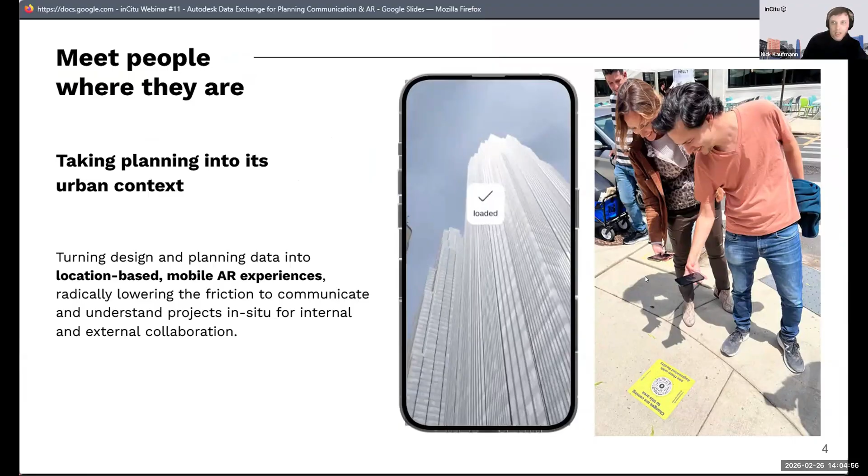We've been at this since 2020, and we work with AEC companies, city governments, developers, and technology products. Urban professionals from places like Washington D.C., Phoenix, New York City are integrating AR and experiential methods into their work, pursuing projects on everything from housing and climate resilience to infrastructure and transit.

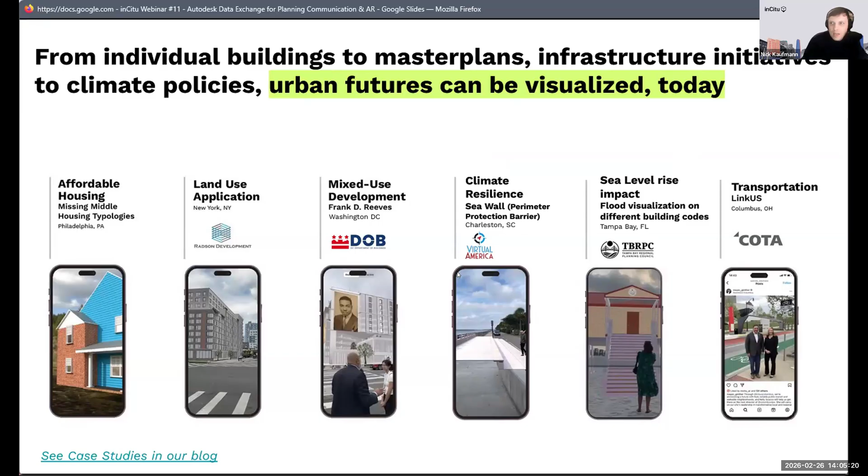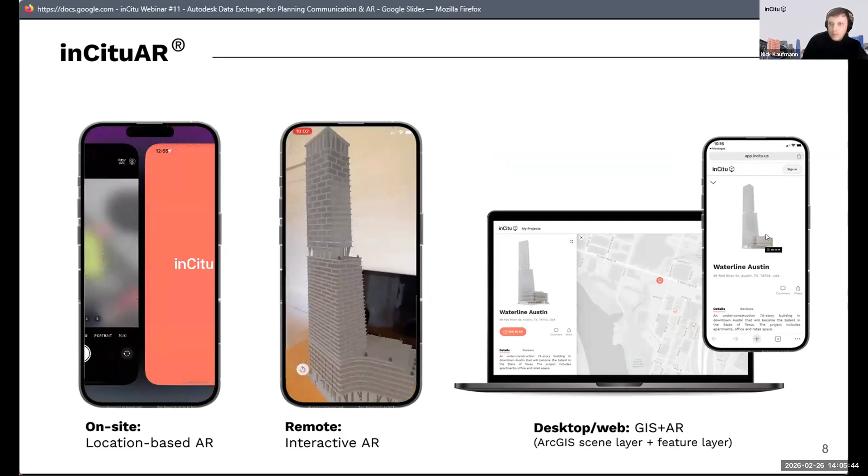Aside from the AR, we do a lot of design for on-site activations, everything from signage to the event programming for engagement, tours, walks, self-guided tours and talks, workshops. We also support storytelling on social media and community engagement campaigns that our clients are running, so that AR is used to actually create compelling stories that are shared out.

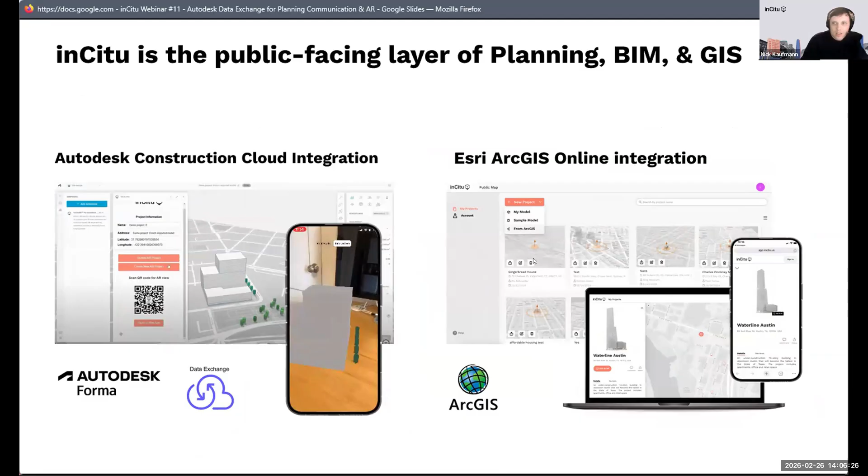A big part of making all of this as seamless as possible is how we connect with the tools and the data that AEC professionals are already using every day. Today's webinar is about exactly that. We're showcasing a new integration between inCitu and Autodesk Data Exchange that takes this connection to a new level.

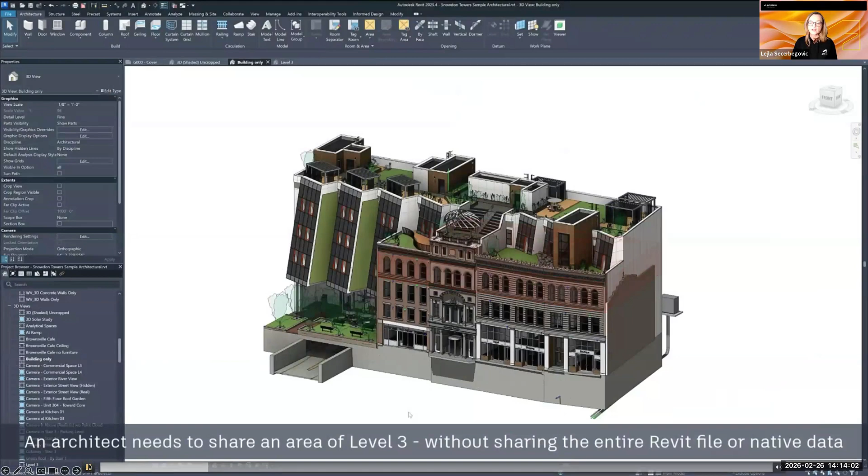So to show you a little bit how this really works, I have a couple of videos. Here you can see how the Revit user can prepare his subset of data. We don't have any complex mapping files or settings you need to compile. You can simply use the built-in tools like filters or even the section box to define which elements you want to share.

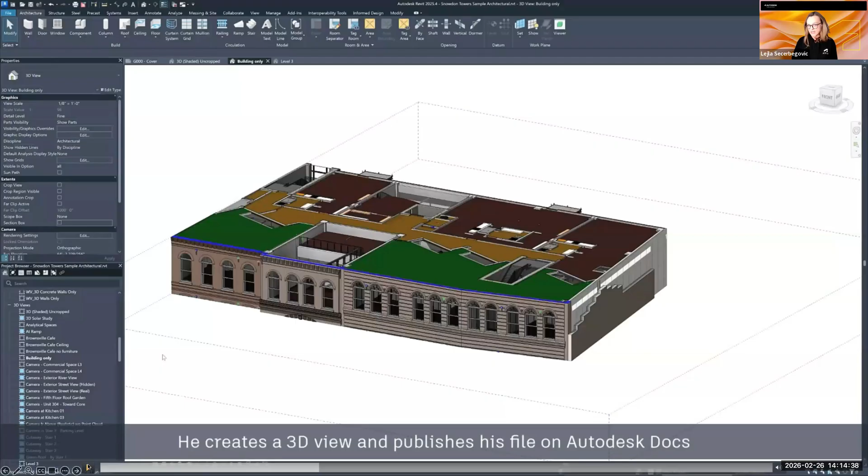Once you have defined these, you could now either use the connector from the Revit environment, which we will see in a minute, or you could simply save this Revit file on the ACC and use the ACC cloud connector. This is what we will see now.

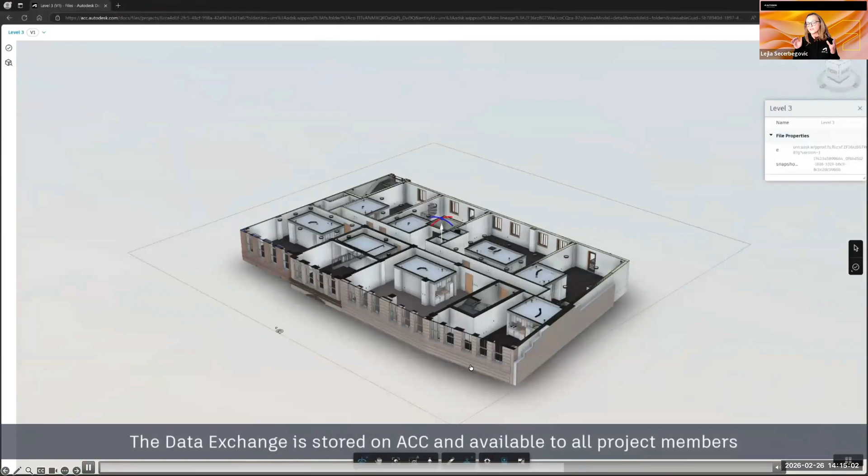So now we see the Revit file on ACC, and here you can simply select any 3D view which has been published to ACC and create a data exchange out of it. You can select a folder where this data exchange can be stored, and then this data exchange can be viewed on ACC like any other file, but it really contains only the data which you have specified, and it will also be automatically updated whenever you update your Revit file.

So this is basically how the cloud workflow works, and the same data exchange, as mentioned, could now be used also in the inCitu app.

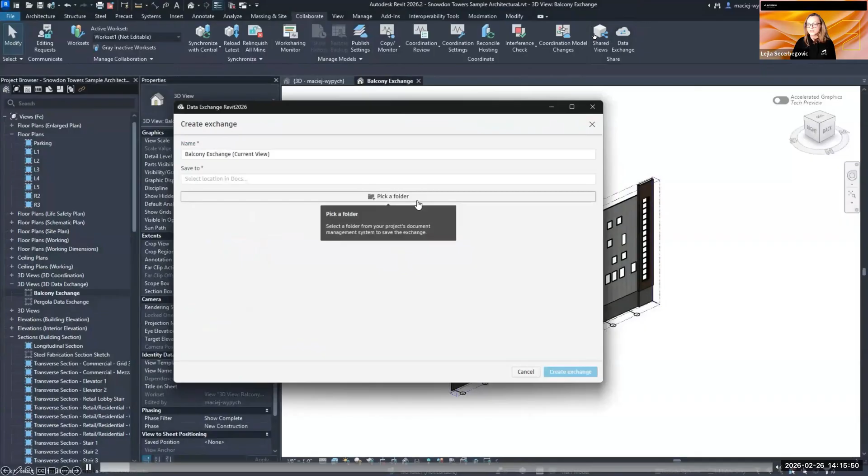To show you a little bit more about how data exchanges are used in the design workflow, let me show you the other way to share a data exchange from Revit. In this case, we are using the connector, which has been previously downloaded and installed.

Here in the connector, you have several different options. You can select the folder on ACC where this data exchange will be stored. You can also have several other options, like whether you want to include or exclude the Revit link elements, whether you want to include rooms and spaces as geometry in the data exchange. You can specify which view you want to use if it's not the one currently open, and then filter by categories as well.

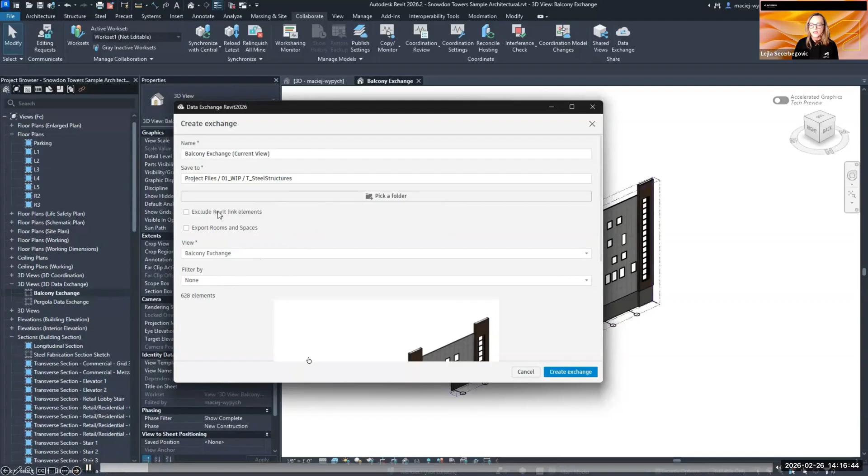So you could still limit the view, and you will always see the preview here. A data exchange is really a lot about what you see is what you get. You really see the preview, and the data exchange we create only has the elements you see in the preview. Again, the data exchange can be reviewed on ACC.

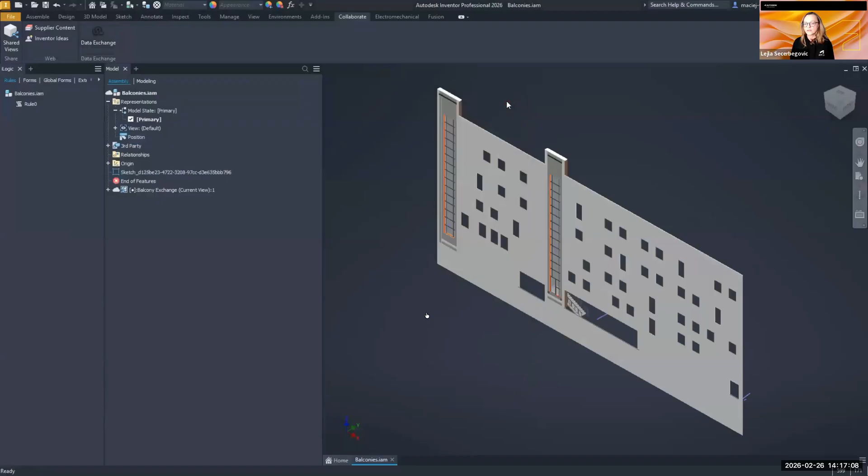It cannot be downloaded because it's not a file, but it can be reviewed and loaded by other connectors as well. In this case, we are loading it with Autodesk Inventor. The Inventor user uses it to configure the balconies, which he then shares as a data exchange with the Revit user.

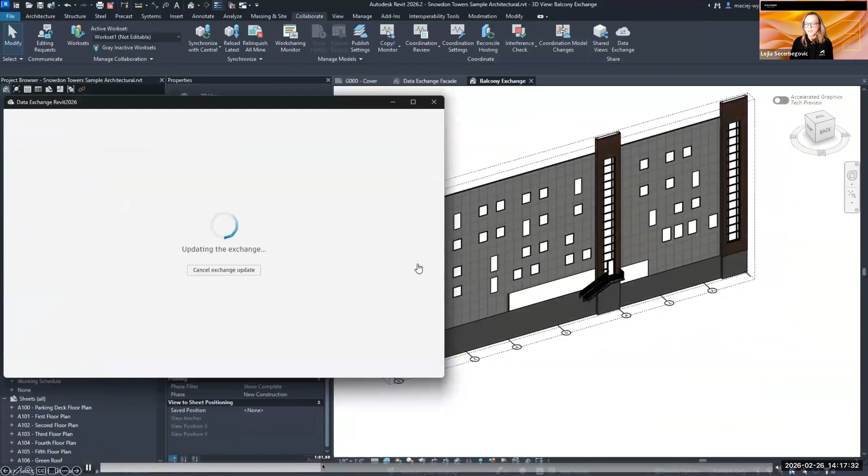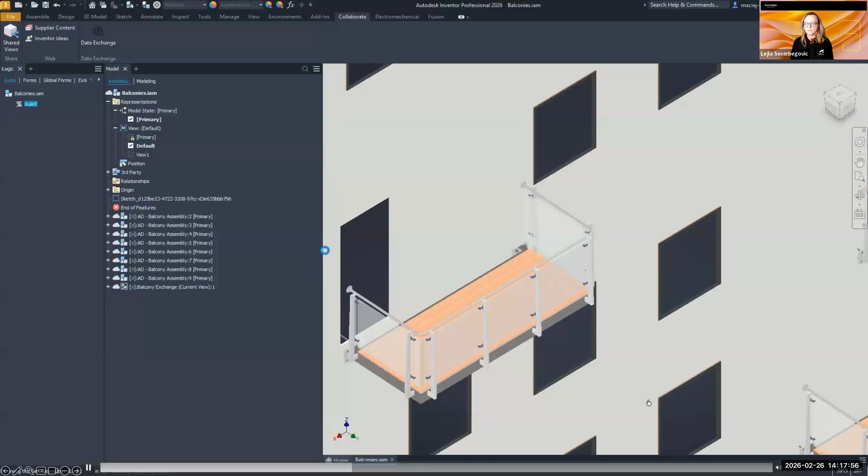And then the Revit user is again able to load these exchanges and maybe update his file, and also share, in this case, some requests with the Inventor user through ACC. So the data exchanges support all the Autodesk Construction Cloud workflows, like the comments and the issues, which can be used for communication.

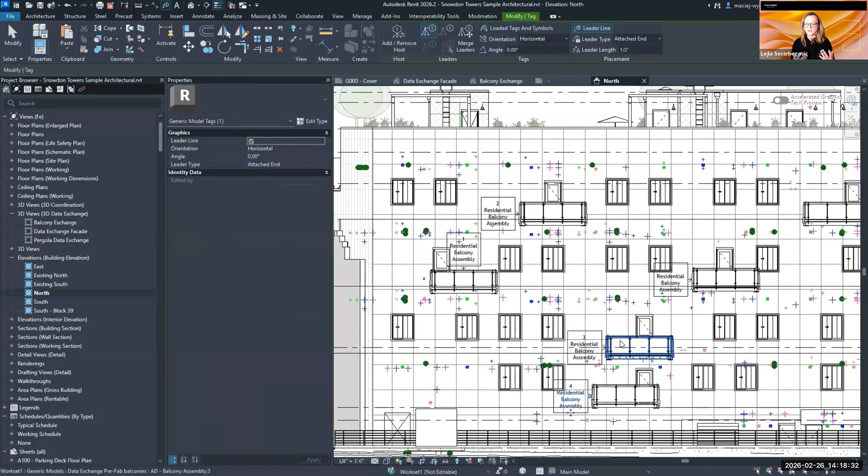Once we have received the updated file from the Inventor user, the data exchange can also be used for documentation, which means you can load these elements and tag them, schedule them, use them in all the sheets and views, and they are typically used for very stable documentation workflows.

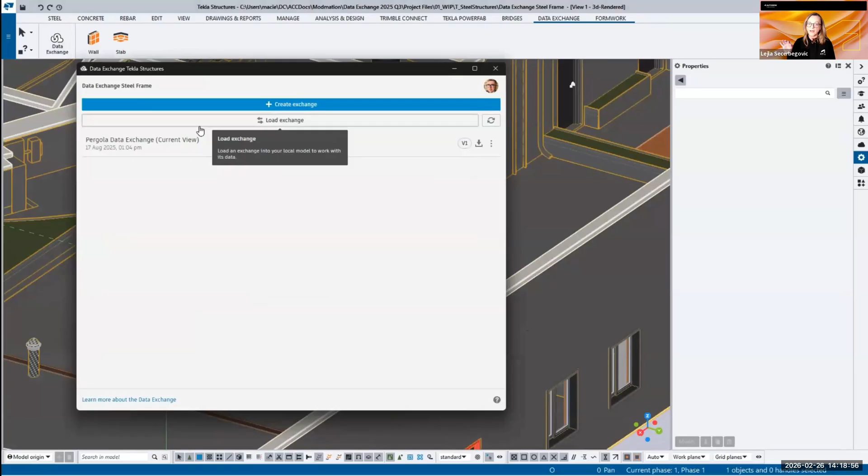Again, the same files can also be used in other software, for example, in this case, a third-party tool, Tekla Structures, where the same data exchanges can be loaded again. This means you really have a thread which goes through all the tools and allows you to use the data in a very flexible way as a reference, without worrying too much about any kind of settings or mappings. You can always adjust these, of course.

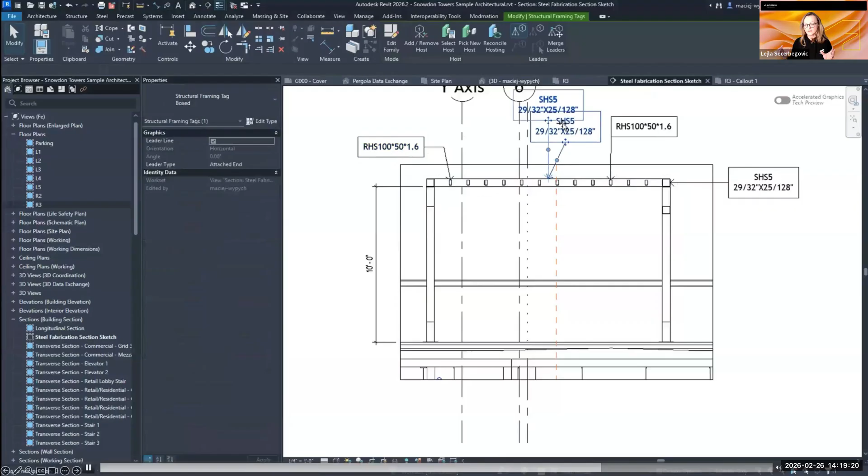But in general, we are able to see what we are sharing, and this is pretty straightforward. This goes all the way to other tools, as you have seen before in the overview of our data exchange connectors. We can also load the same data exchanges, for example, in Rhino software, where it can then be used for other workflows as well.

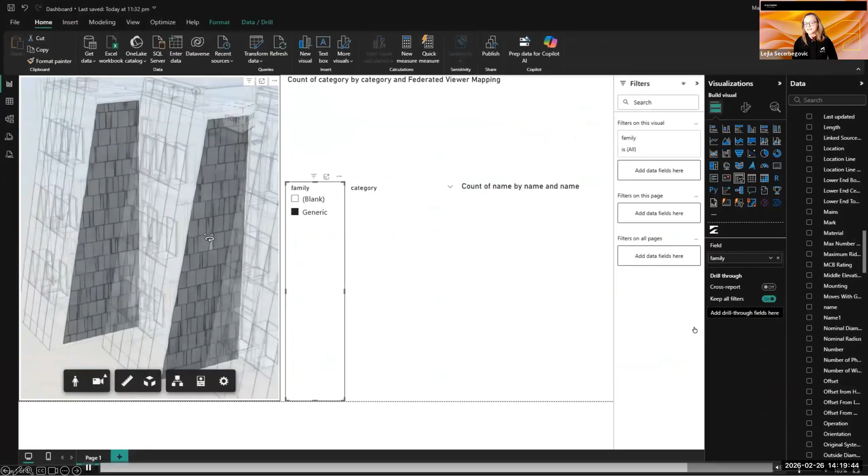And at the end, it can also be used in Power BI for dashboarding the data, because data exchange is not only about the geometry, it is actually about the data, and that means also the metadata which is attached to the elements.

Now to show you a little bit what our customers are doing with data exchange, I have a couple of nice examples. For example, WSP is using data exchange to make their designs and coordination models available to everyone, regardless of their BIM skills and regardless of their actual access to the BIM tools.

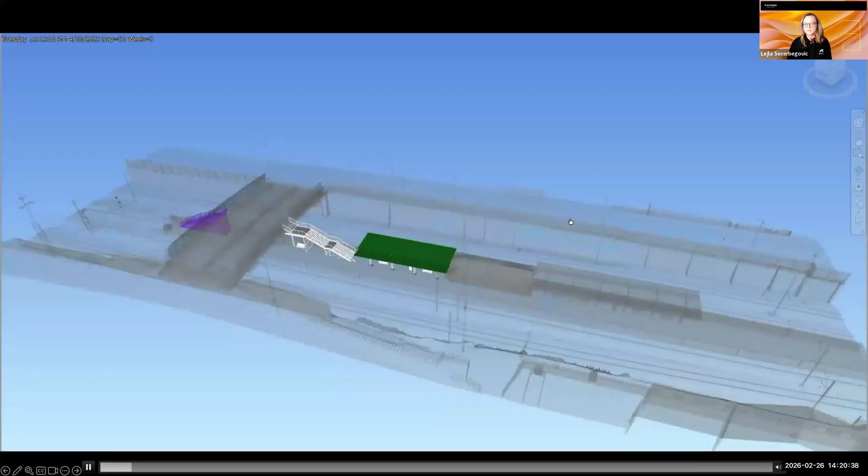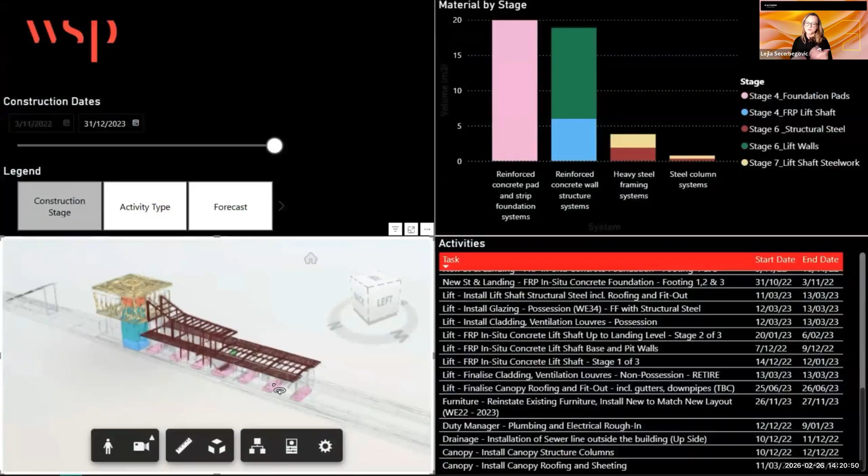In this case, they are using Navisworks to create some 4D simulations based on the project schedule. And since not everyone is really familiar with Navisworks or able to use it, they have pulled this data as a data exchange and then loaded it into Power BI.

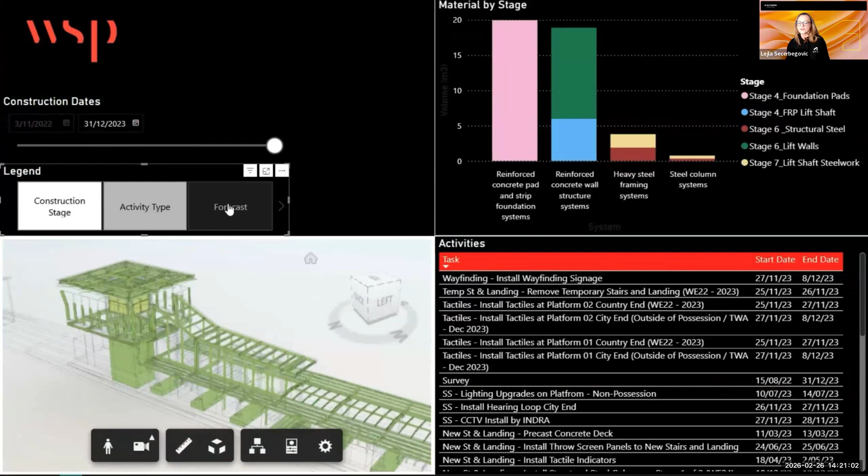And shared the dashboard basically on the web, so that everyone who has access to the dashboard and a web browser is able to use this data. As they mention themselves, this really makes it much easier to work with the data and to make the BIM data accessible to everyone.

A very similar approach is also used by another customer, the construction company Eiffage, who had a very complex bridge renovation project in France with many different stakeholders. They also had a similar challenge like WSP, to communicate the complex timetable and schedule in which the work needed to be done.

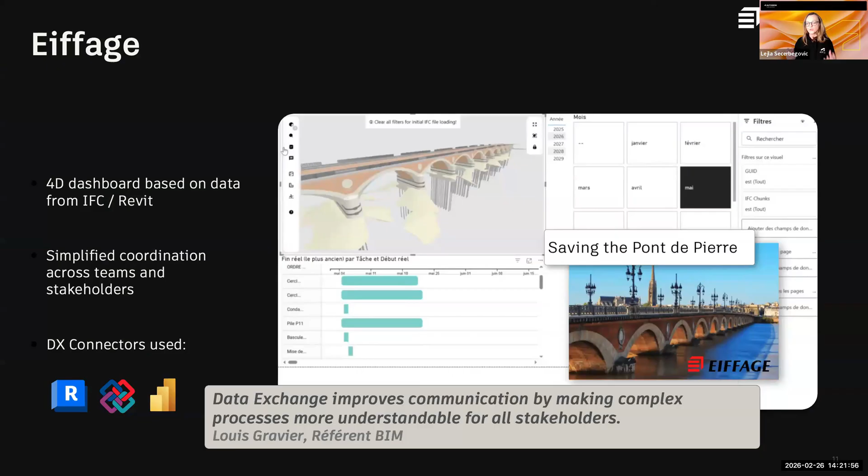And they did it as well using a Power BI dashboard, which allowed them to share this data in a way that could be easily understood on site by all the contractors who were not even able to use a 3D tool or work with BIM software. But they were able to view the dashboard in a web browser and every day check what needs to be done when, and also immediately see in the viewer where exactly the work is being done that day.

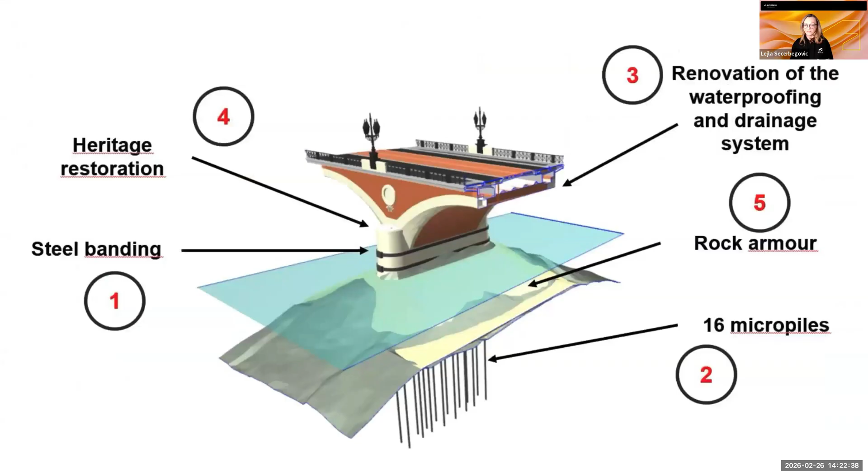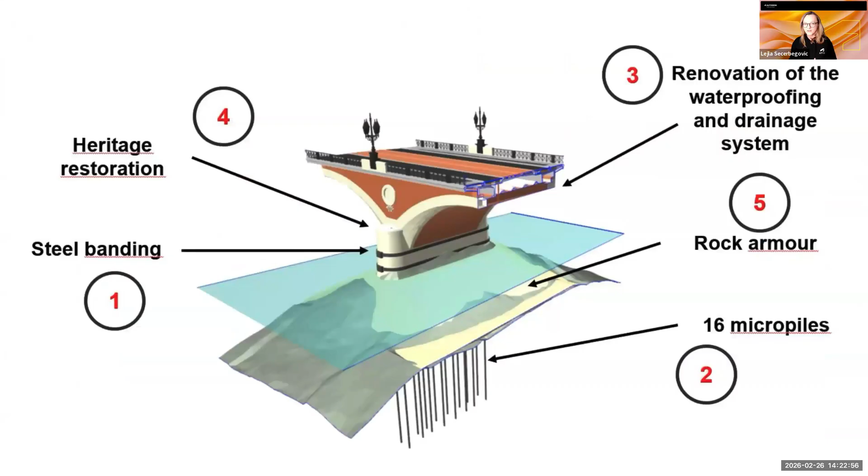And now thinking further and having a look at the great inCitu integration, I think it would have been even more amazing to have the same data exchange also available on the smartphone, because everyone has a smartphone these days, and to be able to also see it in context on the site.

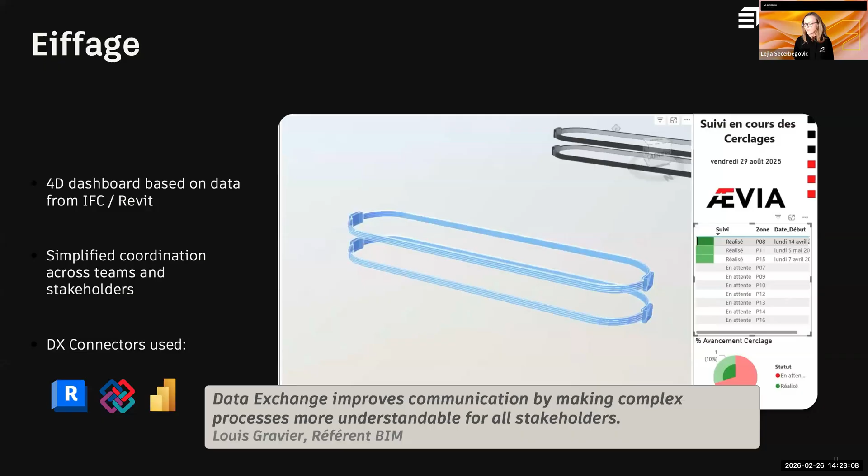That's about this use case, but there is actually a lot more to it, because you are not limited by the connectors which we build. We know that we cannot build all the connectors for all the tools out there, which is why we also work on our GraphQL API and the .NET SDK, which basically allow anyone else, like in this case also inCitu, to build their own connectors to work with data exchanges to create or load data exchanges, and by doing so to also extend the data exchange ecosystem. So I hope this provided you a quick overview of a data exchange.

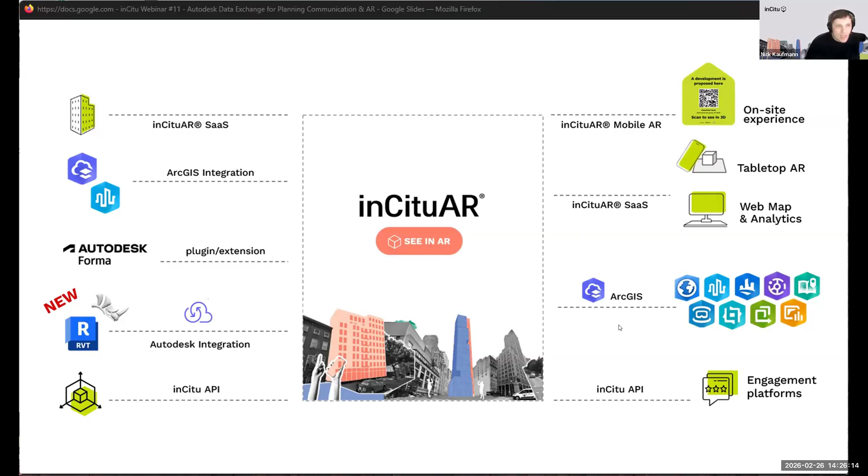On the output side, you can bring that content into AR via on-site signage, mobile tabletop AR, as well as web maps and analytics. And then we also have a host of third-party integrations and embeddables compatible with various tools. So if you wanted to take your tool from Revit, make it into a story map on ArcGIS, or build it into a third-party engagement platform that your city is using, we're trying to connect that all up seamlessly.

So I'm going to show how our integration looks today. This integration was developed by our engineer, Christian Toth, who's in the chat. So if you have any technical questions, or if I get anything wrong, please throw a question at Christian.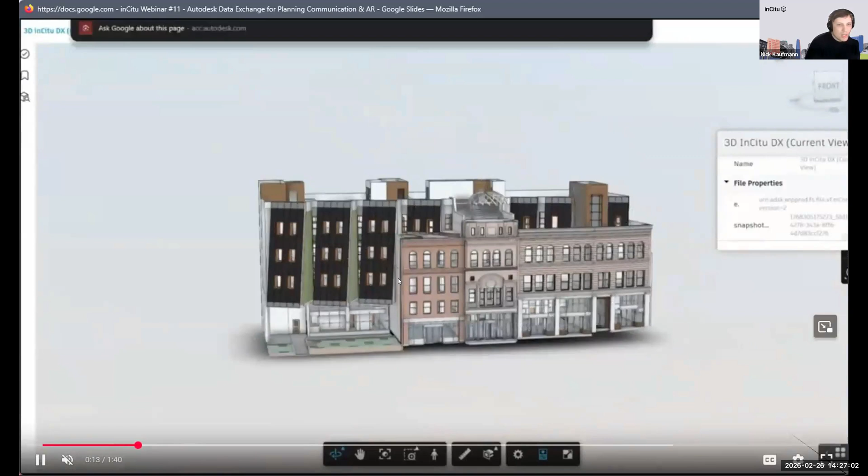We're copying the URL of this data exchange, and then from inCitu, we're going to sign in with Autodesk. And once we're signed in and connected, then we can actually paste that data exchange link directly in, and it will upload directly to our platform.

And so this is a new AR project. This is what you would see after the upload stage. And from here, there is a scene editor here too. So there's two places where you can adjust the content. One is in Revit before you create the data exchange, and one is in our inCitu scene editor, where you can further toggle meshes on and off and move things around and adjust pivot points, which is significant for AR purposes. And then you can also see the file size preview, and we support up to 35 megabyte models.

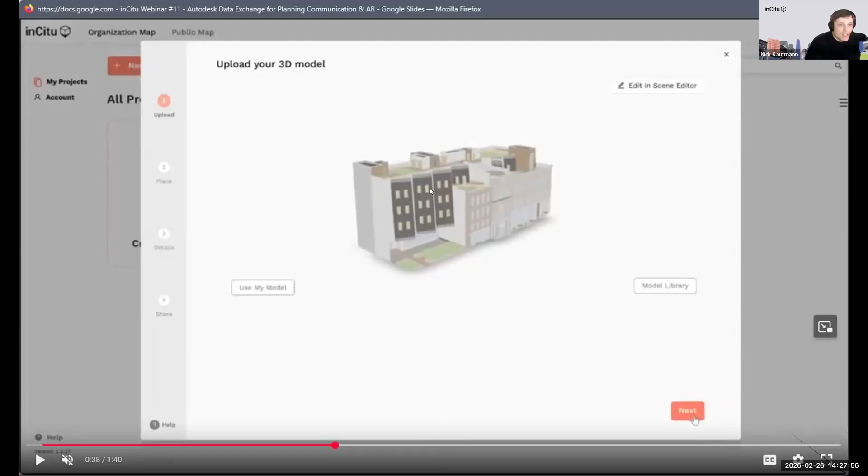So you've seen here, we were able to take just the parts of that big Revit model that allow us to work within that size and bring it in here to inCitu.

So the next step in inCitu is to place that model somewhere on the map, and this is where the model will live in the on-site AR mode. Then we give the project a name, and you can add a description and a thumbnail for the app clip cards, so users who don't have our app installed can view it, but they'll still see some information on their instant app and app clip cards.

And then once you create the project, it creates a QR code that is cross-platform, no app download needed, that leads to this project. If you're on site, you'll see it at real scale. If you're off site, you'll see it in tabletop mode. So once that project is created, you're good to go.

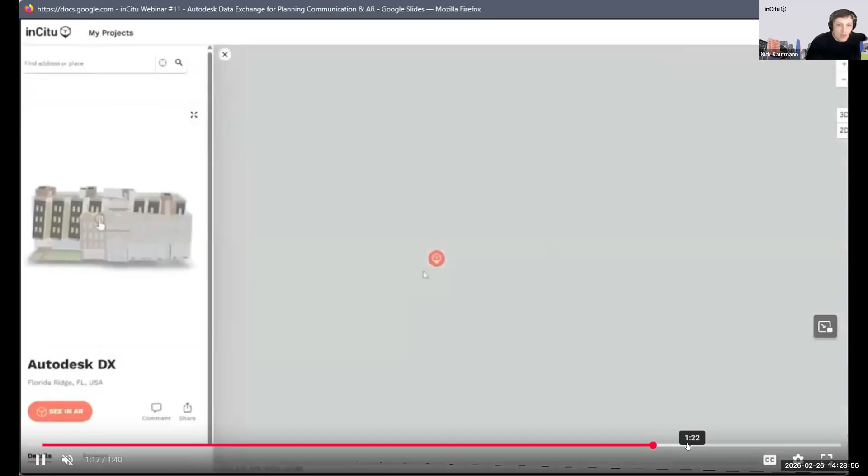And then this is how the web view of that project would look. And since I'm not in Florida, I copied in how this project would look here in New York on the ground. So once you get out on the street, you scan your phone and the project will load in.

And then from here, you have one more opportunity to adjust a project in AR directly using inCitu's AR edit mode. In the top left corner, you can toggle and actually adjust the positioning of the model, the scale, the altitude directly, so you can fine tune and get it looking exactly how you need from your viewpoint. When you save that, all the viewers will be able to see those adjustments.

And so this lets you get the most accuracy out of the current state of AR and actually get off the street grid and out onto beaches and into parks, thanks to being able to set those edit mode offsets. So this project is available now.

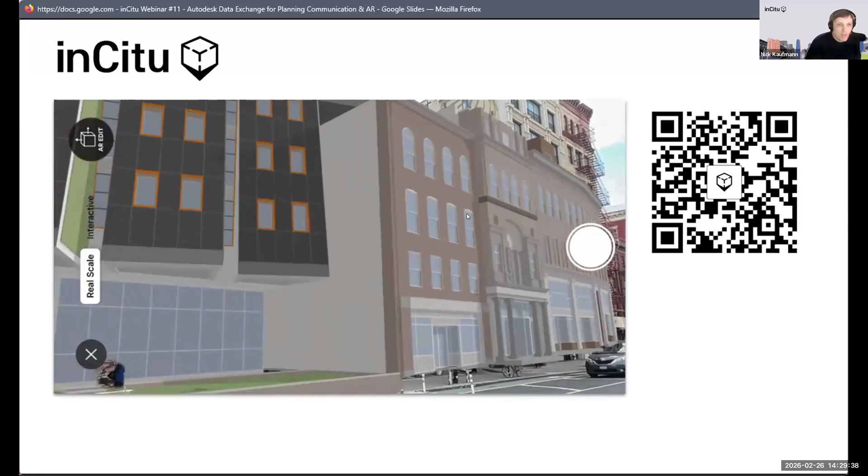If you want to try it out on your tabletop or floor, just scan this QR code. You'll be prompted to open your camera, point at a flat surface, and tap your phone screen to see this Autodesk demo model in AR.

I don't know if anyone else has put this demo into AR yet. I think it looks really great. If anybody's having any issues, just DM Donna or Christian in the chat, and we'll help you check it out for yourself.

Lejla, I did want to ask, just leading into the Q&A portion, about this change that's happening. When we developed our first integration, it was for Autodesk Forma, which is a web-based, early stage site, georeferenced site design tool. And I hear that this web-based platform is actually becoming much more important to Autodesk, such that Autodesk Construction Cloud is going to be renamed to Autodesk Forma soon. So what does that shift signify, and where are you going with this web-based stuff?

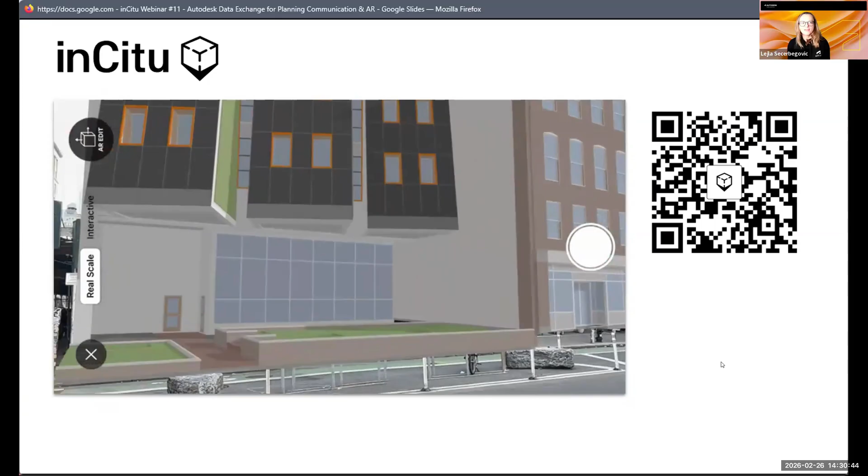Yes, so I think we already announced at Autodesk University that we have these three industry clouds, and Forma is actually the AEC industry cloud. It was meant to be the cloud platform from the beginning, and it's only a case that the Forma site design tool is also called Forma. So on March 24th, we will be renaming the Autodesk Construction Cloud to Forma, which means what we call the Autodesk Construction Cloud, or ACC today, will basically be Forma.

And Forma, which you are referring to, or which we know as the tool, is the Forma site design, and there will be a lot more other variations and flavors of Forma in the future. So basically, long story short, Forma stands for the Autodesk Cloud, and all the tools that build on top of this cloud are subsets of Forma, so to say, or flavors of what's really Forma.

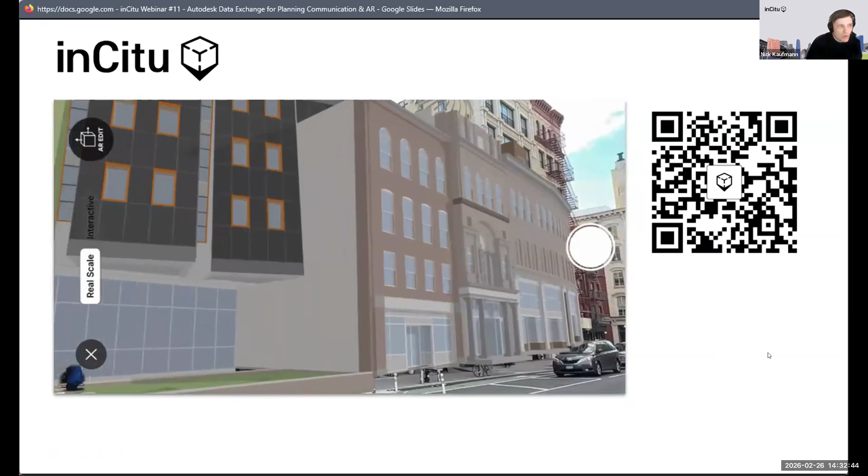Yeah, exciting for me about this is that we can look forward to a lot more web-based real-time 3D tools, as well as the connectivity that Data Exchange is offering. And so inCitu, as another web-based 3D tool, we understand that the entire industry is undergoing a shift towards this sort of real-time 3D use case, from game engines to mobile AR. Being able to speak fluently in this format and this level of detail, this type of 3D content, is becoming more important. We do a lot of training around this with our enterprise clients, and I think it's so great that these new standards and workflows are emerging, and so quickly too.

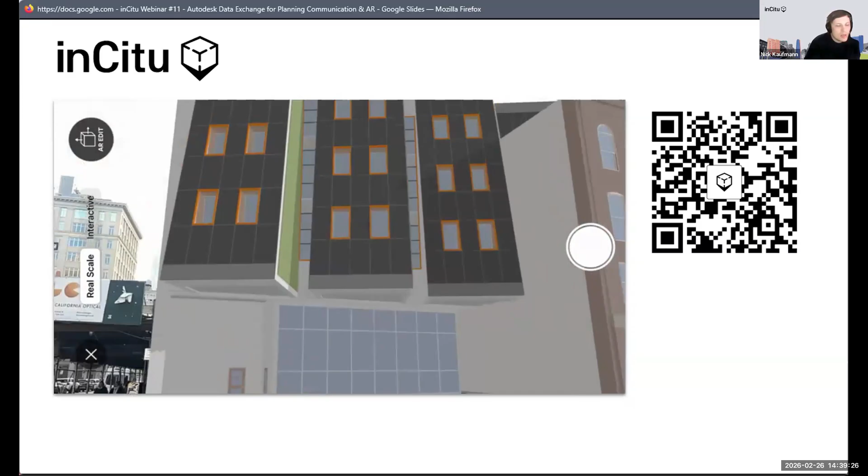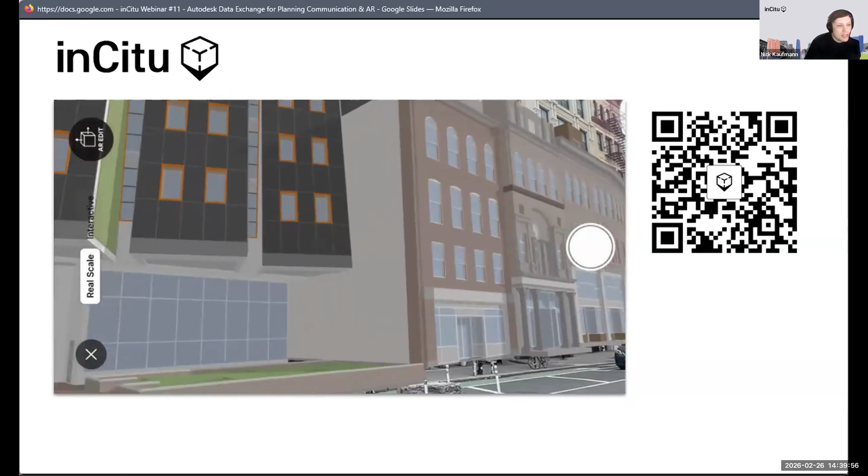I have one more question about 3D and levels of detail. When we got to know the Autodesk Forma user community, a common problem was that a lot of folks working in BIM are working on files that are quite large, designed for construction and engineering. But we have tools designed for communication using interactive real-time 3D, so there's a need for better optimized models with different materials and look and feel. Even though BIM as a standard has specifications for lower levels of detail, a lot of people aren't building their models with those in mind, or following labeling guidelines. But it's becoming easier to create optimized, cheaper versions of these models for interactive tools. What do you think about this friction point and overcoming it? Is it a question of education, new standards, or leveraging AI to automate creating, say, a 35 megabyte version of a 6 gigabyte file?

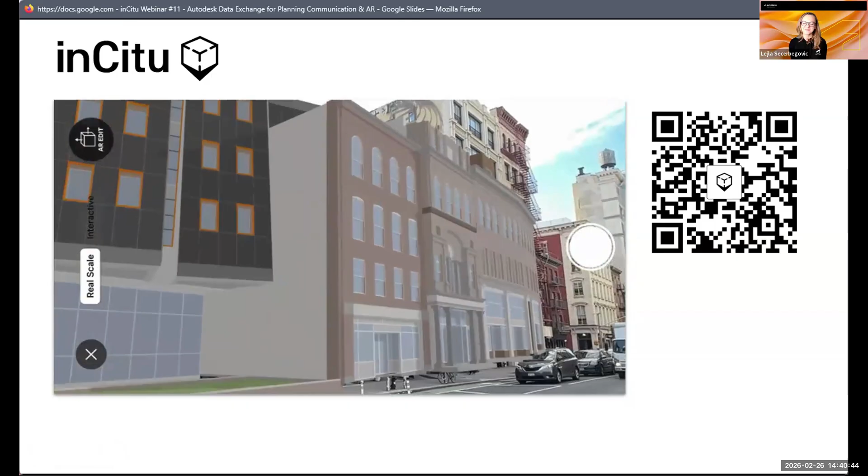I think an AI workflow would be amazing. We're still not there that we can simply say, 'hey, I want a really small size version of this model.' Today we still rely a bit on ourselves to specify which data we actually need. For example, if we have an AR scene, the architect will want to decide what's relevant and what's not. We often see models which have plants and very small details included, which makes such a scene incredibly heavy and that's not needed at all.

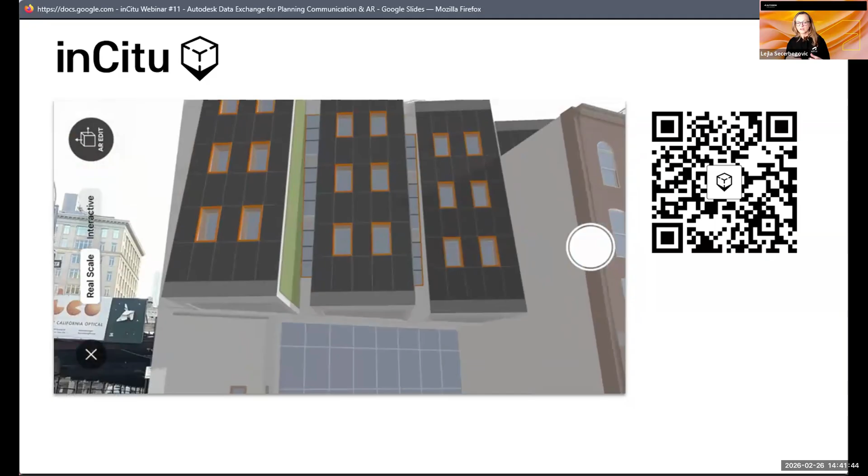What's simplified a lot by data exchange is that we can share only what we see. A lot of other workflows have complex setups, like when you export an IFC file — you have a lot of settings and mapping files available, which are often a bit overwhelming for people. Data exchange allows you to do this simply by using view filters, so you can check what you can see in this view. You can even section the view, and once you only have the elements relevant for this specific use case, you can easily extract it.

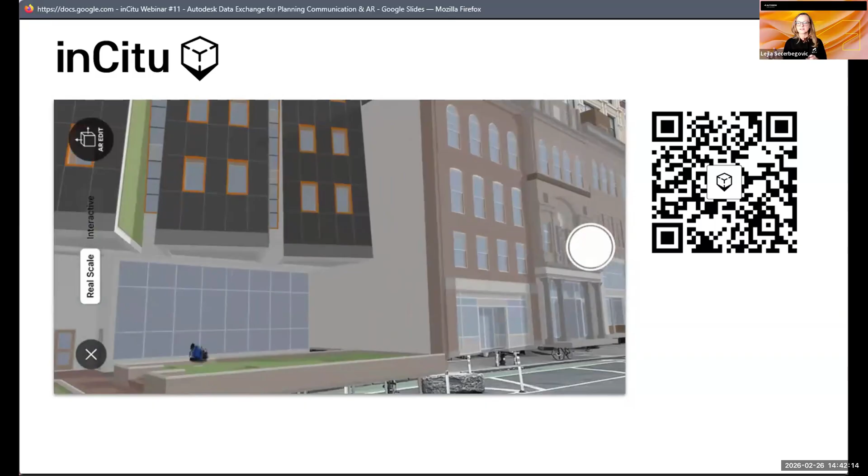The idea of subsets is also very powerful, because I can have one Revit file and extract several subsets for different use cases — one for the inCitu workflow, a separate one for the Power BI workflow, and another for the structural engineer. Whenever I update this one Revit file on ACC, we basically update all the data exchanges associated with it. So it makes this whole process a lot more seamless once we've specified, based on categories or views, whatever best fits a specific use case — then the updating becomes seamless if we use a cloud connector.

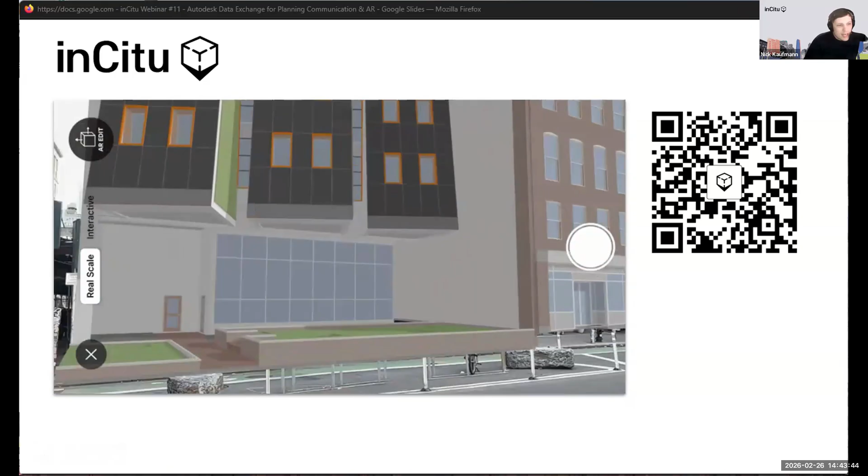I guess I really only have one more question, Lejla, which is this level of connectivity not only depends on the technology you're developing, but also a friendly relationship across different companies and products. Clearly something has shifted, because I do remember a time when there were a lot of moats in this environment.

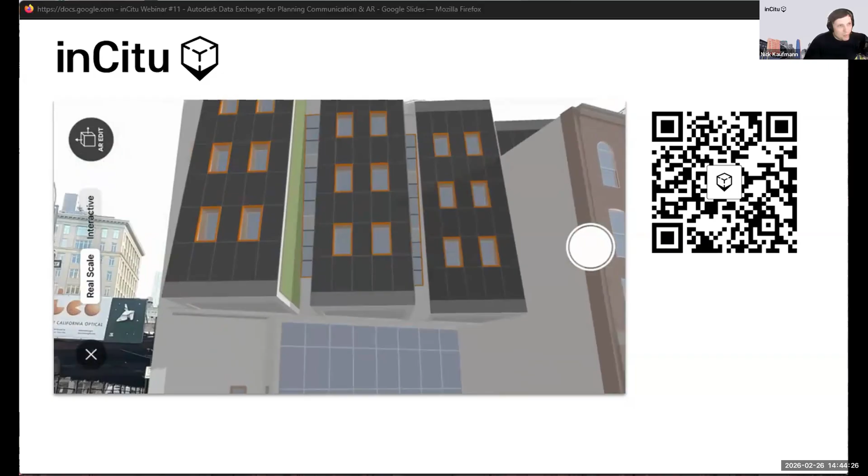And it's kind of amazing to see the past few years, how many third-party partnerships and integrations have launched across some major players in this industry. Can you speak a little bit to that, like you are hosting some connectors directly to your competitor products as well? What is the problem that convinced everybody to start to build bridges, and why now?

Well, I think the bridges have kind of always been there, they just haven't always been so simple. I think cloud platforms and this granular approach to data make it a little bit simpler to build the bridges. When we think about the many tools we need to use across various workflows and projects, we need to share the data, because at the end of the day, it's not about the tools, it's about the data. Data interoperability makes no sense if we limit it only to our own software, or if anyone only collaborates with their own tools, because our users use a lot of different tools across the project and need to share data between them in a seamless way.

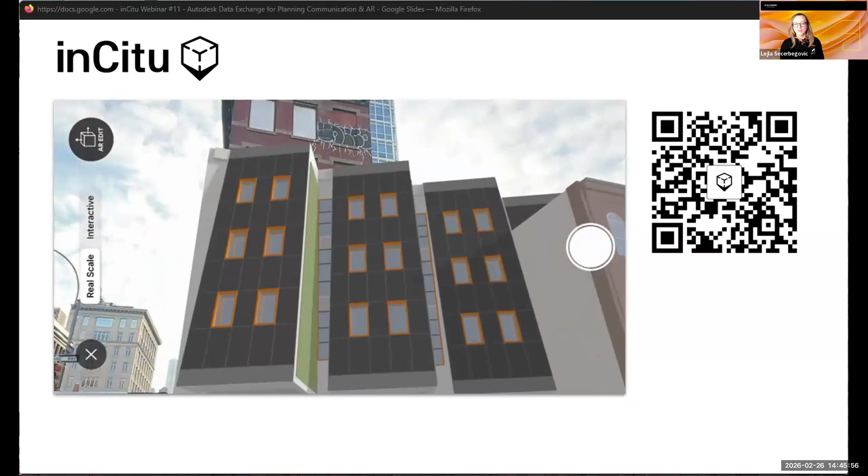I've always been very passionate about data interoperability, and also working a lot with other industry standards, like IFC. There are a lot of frictions, because architects and engineers and everyone working on a project don't want to spend hours, days, months learning about a standard just to use it. They just want to share the data in a seamless way, and that's basically what we're trying to do: make this whole workflow of sharing data seamless and easy to use.

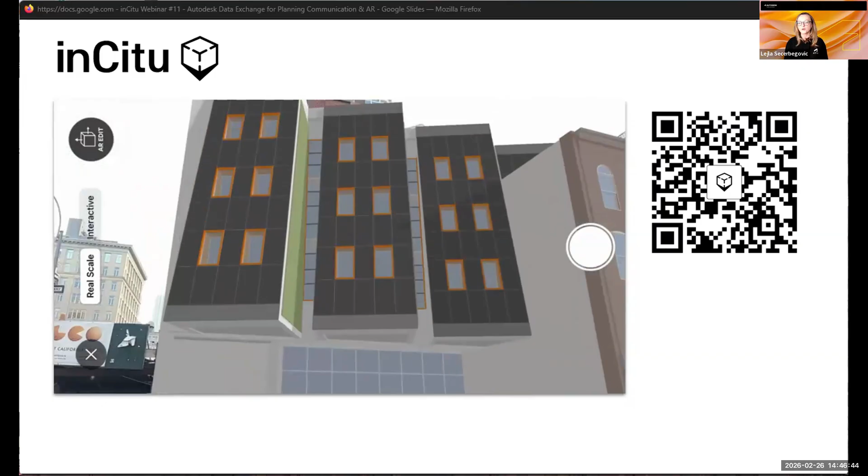No matter if you want to share your data with someone working with another BIM software, with someone who wants to visualize it in a Power BI dashboard, or, like in your case, in an augmented reality app.

Very cool. Absolutely, yeah, it's not just across companies, but across disciplines as well. I've heard so many discussions around how, especially architects for some reason, prefer to work versus the emerging standards. Thank you so much.

I would offer an opportunity, Lejla, to shout out any opportunities for folks to get involved in the data exchange community. Is there a developer community, and are there any upcoming events where folks can learn more about who is building for this?